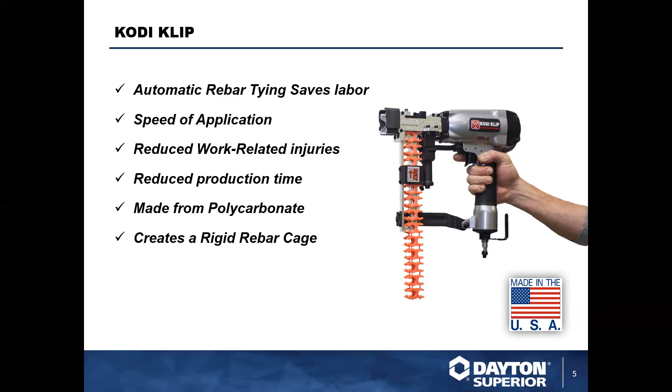It doesn't want to rack either left or right. You can actually pick it up and move it, and it will stay connected. Of course, obviously, being that it is polycarbonate, the one big thing is it is rust-free. It will not rust, so we don't have the issue of introducing another product to these concrete slabs that can create rust.

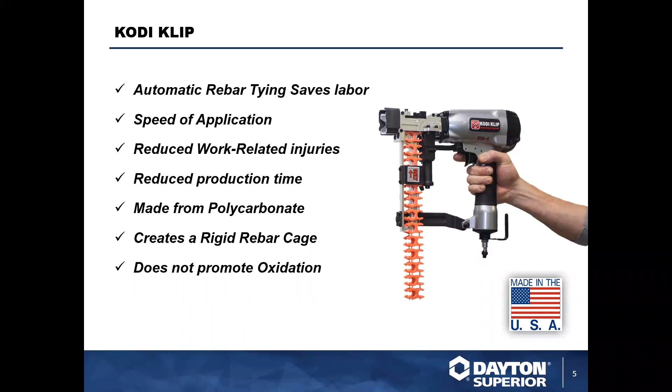Rebar, where are we going to use it? Typically, when you're looking at post-tension cable connectors, it can be used for that connection. It can be used for lap splicing rebar. It can also be used in the intersection of rebar.

Typically, you point the gun at it. The gun has a couple of notches cut out in the head so that when you face the top rebar in the shape of those notches, you let the gun seat in it, pull the trigger, and connect the two pieces of rebar. When using it for a lap splice type connection, you can turn it 90 degrees, attach it to the bottom bar, and then physically with your hands take the top bar and snap it into place.

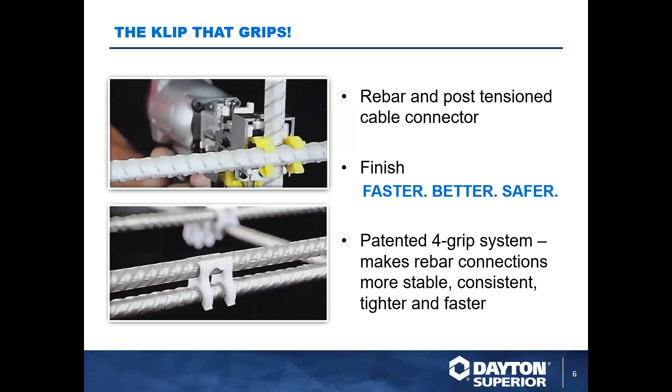You're looking at this being faster, better, and safer. Like I said, you don't have to worry about rust. You don't have to worry about anybody getting hurt, and time-frame wise, it's much faster than if you had to do it by hand.

Great thing about Kodi Klip: you have black bar, it'll work, it won't rust. If you got a black epoxy bar, it won't rust. If you got stainless bar, it will make the connection and won't rust. Same thing with galvanized bar and composite bar.

Now, if you had to use tie wire in this situation with black bar, you'd have to use plain tie wire. You'd have to use epoxy-coated tie wire for the epoxy bar, stainless wire for the stainless bar, and galvanized tie wire for the galvanized bar. And for composite bar, I am not sure - I think the recommendation is somewhere between galvanized and stainless.

But where are we looking at using this product? Obviously, the precast concrete industry. Any place that concrete is actually poured is a great resource for this gun to be used on, especially any place that has small rebar cages that need to be assembled.

For small commercial projects, pool construction, where you're seeing a lot more of the specification coming out with the fiberglass rebar or the composite bar being used, so you don't have rust in that area. And any place where you're seeing FRP rebar applications, we're seeing tilt-up wall panels, construction panels throughout the site.

Now, we have a series of clips that are available here, and I'm going to turn it over to A-Roll to let him talk about this, because this is kind of his thing. He is the Kodi Klip man. So, A-Roll, if you'd be more than happy to please take over.

Thank you, Chuck. And welcome everyone to the Tuesday training. The Kodi Klip system has been around for quite a while. Some of you may know about it, some of you may not. But it's a unique system for the application of connecting rebar.

What we did is we color-coded these clips for observation from a distance. When you're the safety inspector on the line, or the steward, and you've got to inspect the rebar on the field, you normally have to inspect it close up to know if that's a 4-to-4 bar or 5-to-5 bar. But with the Kodi Klip system, you can look, and if it's a red clip, you know that's a 4 connection to a 4 bar, meaning a 4 bar on the bottom and a 4 bar on the top.

If you see an orange clip in the field, then you know that's a 4 bar to a 5 bar. The superintendents that have to come out and inspect all the jobs before the pour love this method because they can stand off and actually view the color of the clip and know what bars they're connected to. If you see a white clip, that's a 5 to a 5.

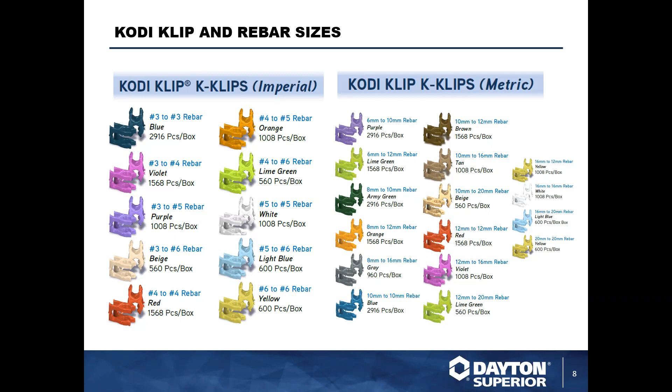Why tie when you can clip? Like I say, clipping is faster, simpler, easier, non-corrosive.

Non-corrosive is the thing. It's taken the country 10 years to get to a point where they wanted to elevate construction products to 50-year, 75-year, 100-year lifespan. And when you're putting corrosive products into the concrete, you shorten the lifespan.

But now they're really serious and focused on building products that last 50 to 75 to 100 years, and putting non-corrosive products in them.

Versatile, the clip also works cross parallel, vertical connections, or just standard. They're strong, a very strong product. No motion once you connect it.

As far as specs, as far as the side-to-side specs, sometimes they call for a 1/4 inch movement or less. The clips are very strong, and it really helps with that process.

They snap into place easily with the tool. The tool has a safety mechanism that allows the bar to go easily across the rebar and connect fast when you pull the trigger. And the clips, like I said, are very easily identified.

And the system has been really instrumental in helping to save time when it comes to jobs out in the field, like Chuck was saying. That is right now critical of what's going on in the field.

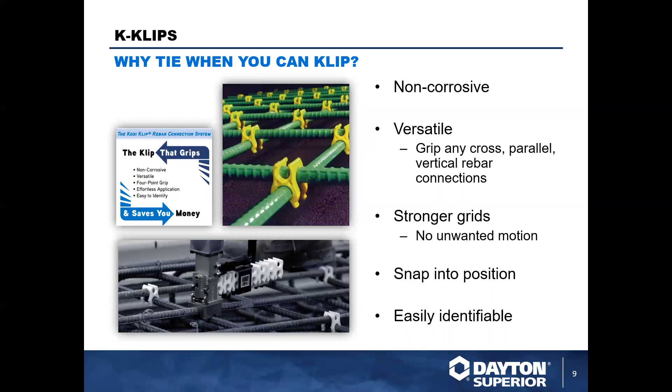The tools come in series, and they're lightweight. We cover from number 3 rebar to a number 6 rebar. We have 4 tools that do that.

Lightweight, high impact. When we started in the precast industry, you will find that it's a pretty rough industry on tools, on the people themselves as well. And so we had to make this tool very strong.

Application, because they'll use the nozzle to tap the rebar over. If it's slightly out of place, they'll take that nozzle and tap it over, move the rebar. So the tool itself had to be very durable.

All clips connect in a millisecond. Quick magazine, when you need to replace a rack of clips, you just put it on that rail on the magazine there and push it forward.

The system is designed so the last clip acts as a safety. It will not shoot, and allows you to re-rack and put another rack of clips in there to put a little force on that last clip and make sure it lines up properly inside the nozzle.

Energy efficient when connected to air. Most precasters have air. Matter of fact, I would say all precast plants use air. They have air run through the plant.

And sometimes you'll find that they'll have staging for the steel reinforcement areas that may be separate or moved away from the main areas, and they have to move these clips, move that product, and they can crane the product, they can forklift the product, because it's very, very sturdy once connected.

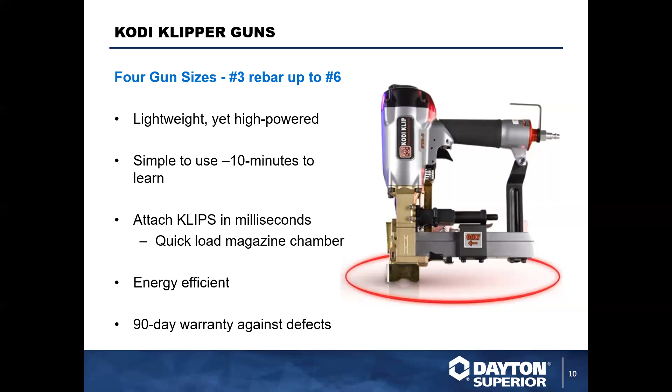Of course, we have a 90-day warranty on defects of any product that comes out brand new. We're also working on other warranty type products just for the precast industry, because that is a production industry. They work yearly.

The KTA 4 clip tool clips a series, and that's how we look at it, as series. It clips the 3/4, the 4/4, and within the millimeters, the 6 to a 12 millimeter, 8 to a 12, the 10 to a 12 millimeter, and the 12 to a 12 millimeter. That one tool will clip those clips out in the field or even in the precast industry.

We also have a number 3 tool for the smaller clips. The number 3 tool has been utilized mostly in Mexico, Canada, and overseas. They use a lot of the smaller bar than the United States does.

Then we have the number 5 tool, 3 to a 5, 4 to a 5, 5 to 5, into your 16 millimeters. And then you've got your KTA 6 tool, which is the largest clip and tool that we make. Now all the tools are just like you see on this picture, they're all the same size. The back end is the same back end. What changes on the tools is the nozzle and the rack to accommodate the clip size for that series. Other than that, the back end of these tools are the same.

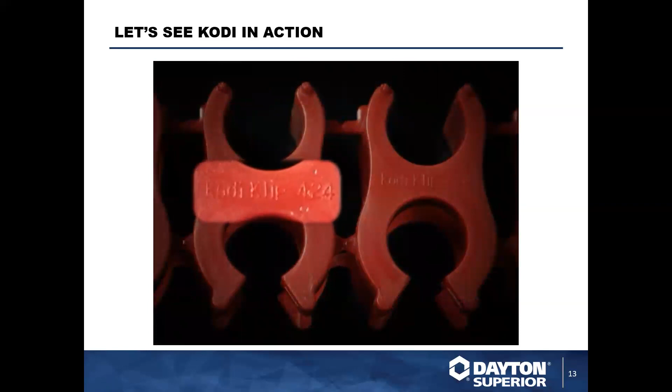Notice the clip is identified through the series. The main clips are identified within the molds.

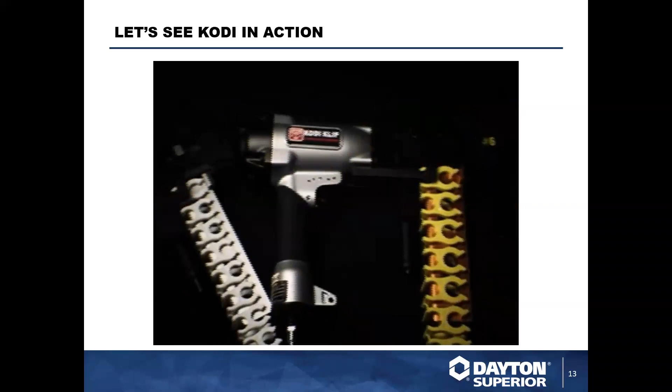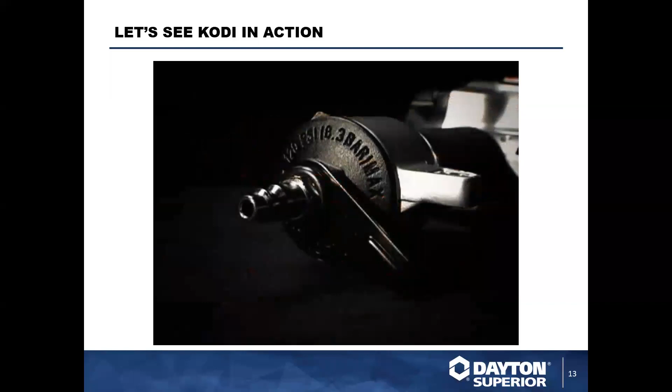You would oil these tools daily as they're used.

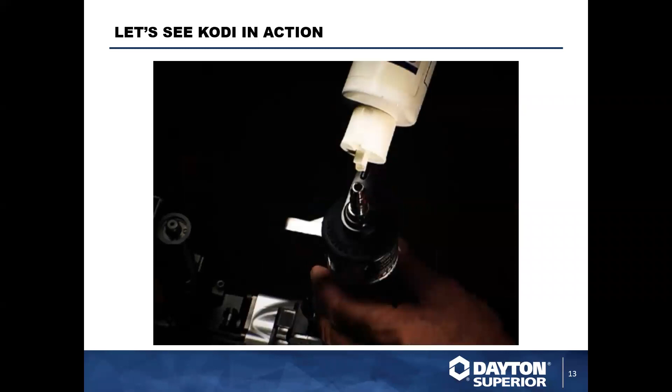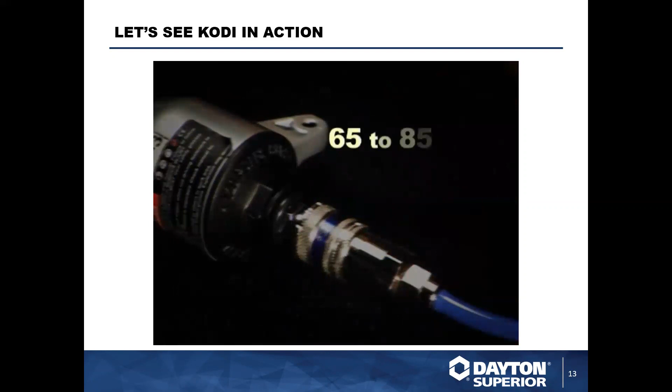For the clip, pretty much the air is at 90 PSI. We'll shoot all the clips, or 65 to 85 PSI for the smaller clips.

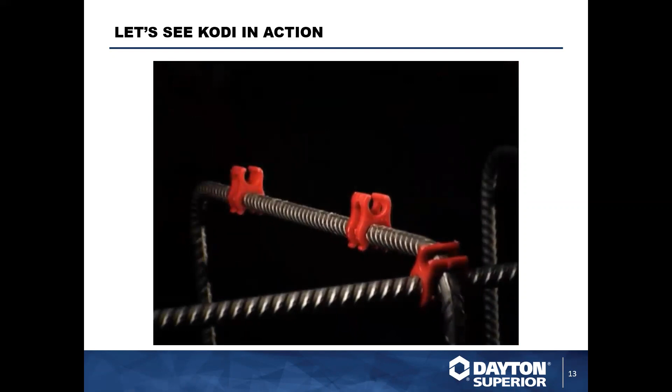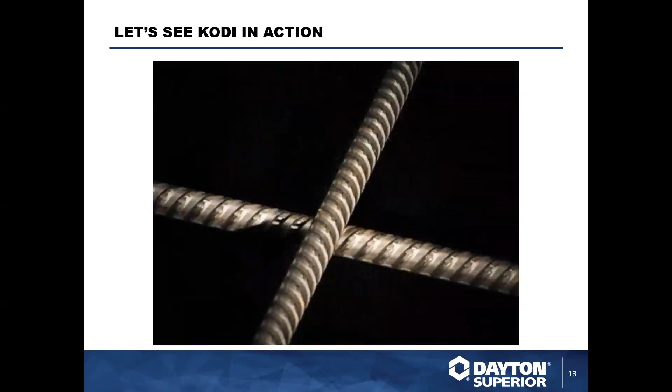That is the lineup angle. There's your splice.

Epoxy bar is used more and more now, and even the precast industry is starting to migrate over to FRP, or basalt, that is your fiberglass rebar.

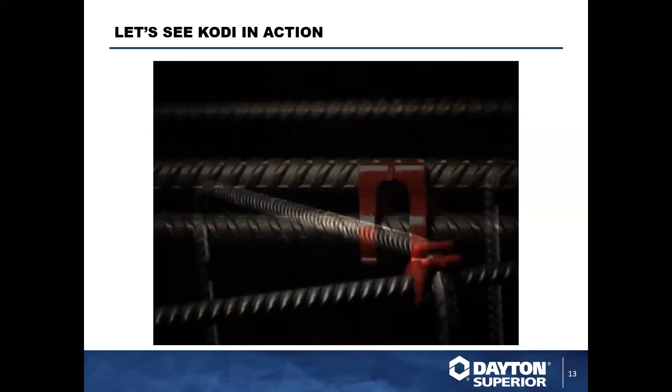If you notice that angle, that 90-degree angle there, that curve, you'll get that question: will it do that?

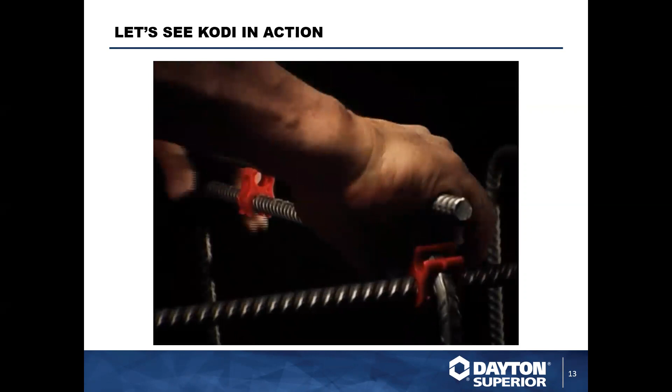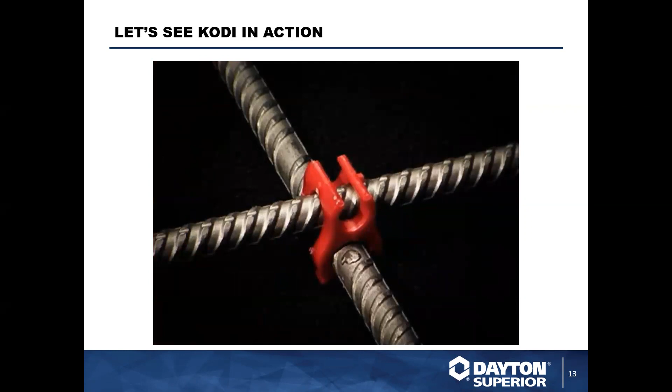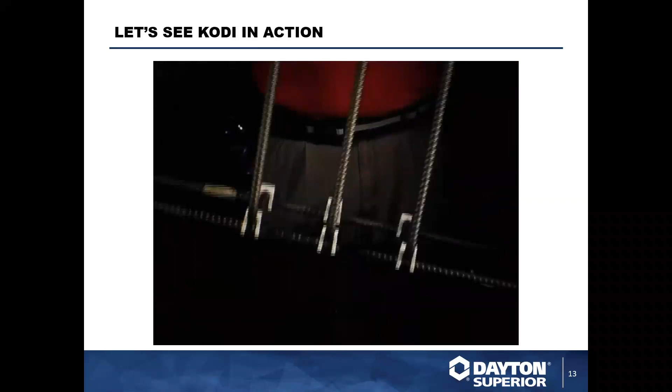To clear the clips, you just open the top, and the clip should always come forward. If it goes backwards, it will jam on the pins that allow it to push forward. You notice how the releasing is simple. Clip that grips.

All right, thank you, Chuck and Errol. That was awesome to watch all that and the tutorial through it.